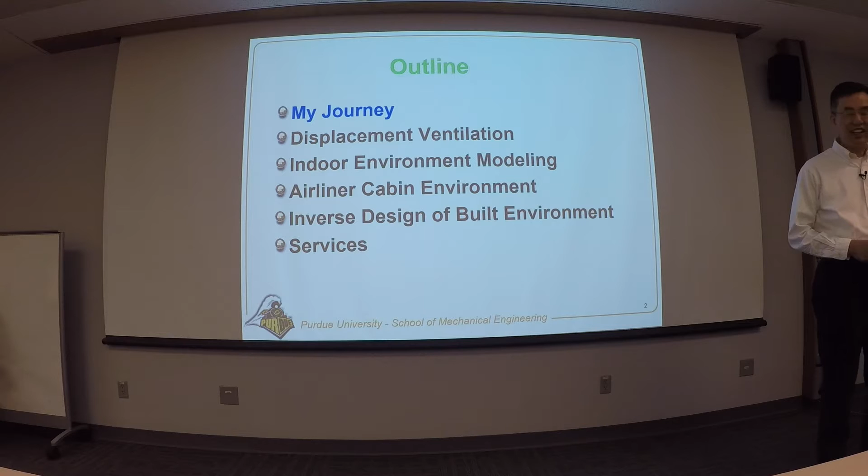So this is my outline of the talk. I will give a brief overview of my journey. So I grew up in a rural area in the southern part of China on the opposite side of Taiwan. And in 1978, I went to Tsinghua University and I received my bachelor degree in 1983. So it's a 5-year program. Then in 1984, with the sponsorship from the Chinese government, I was able to study at the Delft University of Technology, where I received my master's degree in 85 and PhD in 88. So I still love this place and I still remember that's the window of my office. So I've been there for 4 years.

Then within Europe, actually, after I finished my PhD study, I went to ETH Zurich to do my postdoc for 2 years. And then I returned back to the Netherlands working for TNO as a project manager. So TNO is like a national lab, but it's very applied. So it's more or less like a kind of industrial experience to my view. Then in 1995, I went to MIT, so restarted my academic career, where I served as an assistant professor and associate professor. So then 2002, I moved here to Purdue, the best place on earth. So, during my tenure, I've been working as a visiting professor, affiliated professor, adjunct professor, and honorable professor in different continents, including Asia, Australia, and Europe, for more than a dozen times.

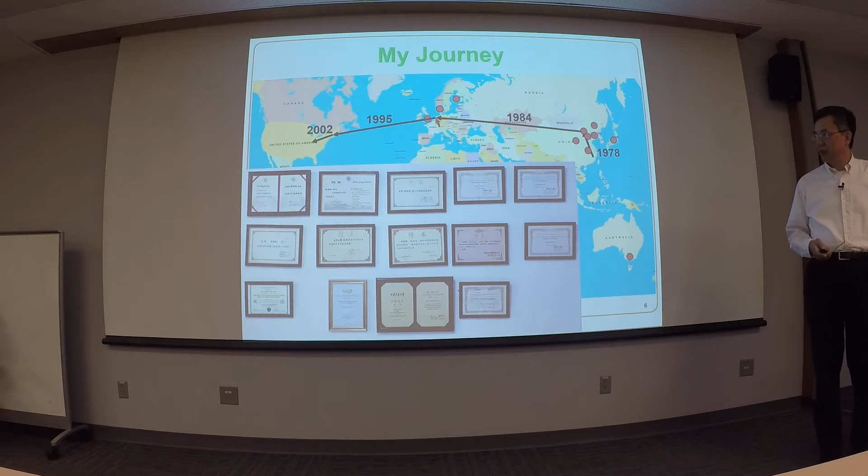So why did I end up with the building sciences? So when I grew up in the southern part of China, at that time, we lived on less than 1 yuan per day, not $1 per day. That's like a 10 cent per day type of life. So my biggest dream was not to become a farmer. But I grew up during the so-called Cultural Revolution. Probably everyone still has a kind of memory if you are sufficiently old like me. So this dream was very difficult to realize.

But fortunately, after the Cultural Revolution ended in 1976, Deng Xiaoping, the then Chinese leader, decided to restart the university. So then I was fortunately admitted to architectural engineering at Tsinghua University, the best university in China. So why I selected architectural engineering was because of my father. My father was a supervisor for a local merchandise company for all kinds of constructions. So he always brought home a lot of drawings and so on.

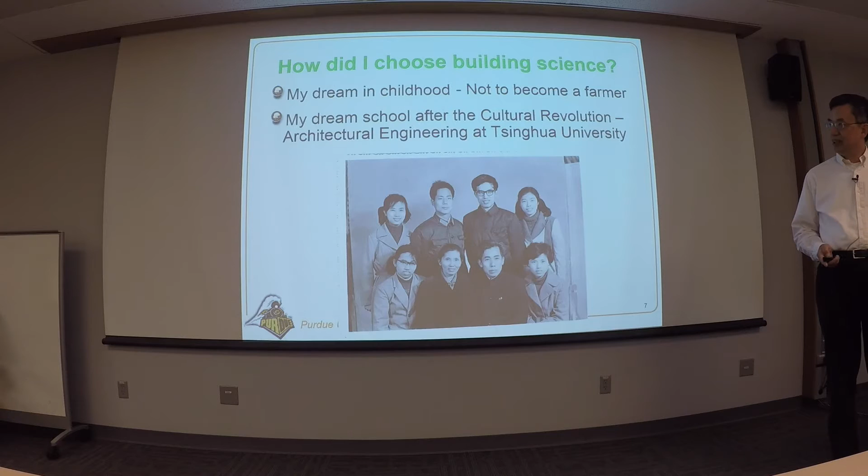And for me, I think that was really nice. So that's why I think I should study architectural engineering. But when I went to the university, I found that, yes, I get into architectural engineering, but there were only two choices for me: either I study architecture or HVAC, and not the civil engineering I had in mind.

So for architecture, I never learned how to do drawings. So I don't know how to do anything with architecture. Definitely I'm out. So I have to select HVAC. So it's not a very sexy area, but I found it's fun, for the rest of my life.

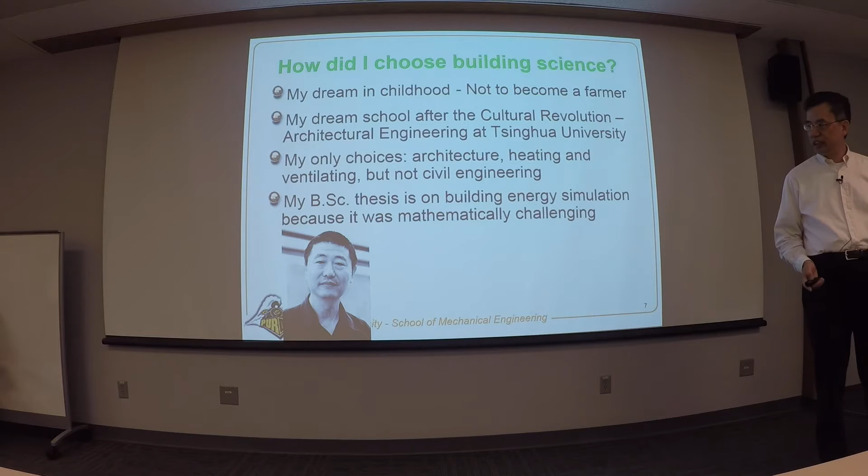Then for my bachelor degree thesis, I finally selected building energy simulation. And I made the choice because I think it is mathematically challenging. And that's because I work with Professor Yi Jiang, who is the son of a math professor. So he always taught me how to use different types of math to solve the problems, and that really fascinated me. And now Professor Yi Jiang is an academician of the Chinese NAE.

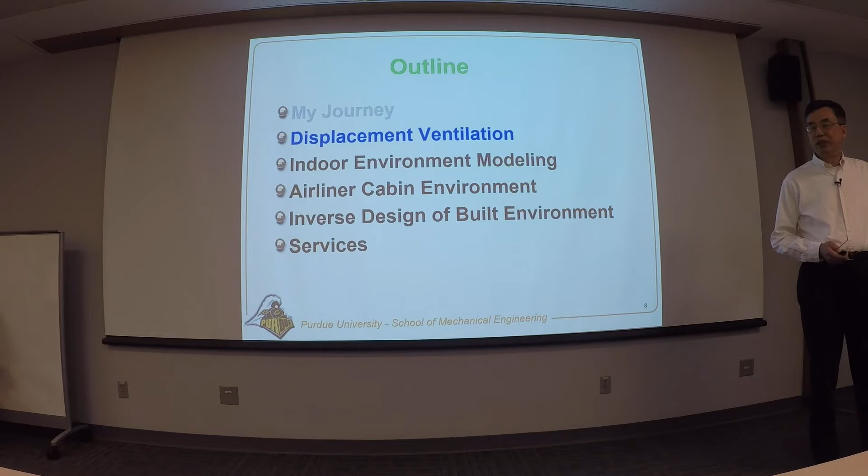So then the question is, how did I end up with the building environment? The energy and the environment is more or less like a twin. So in the 1970s, we know there's an energy crisis. The gas station in the United States doesn't sell gas. And energy was a big issue, like the energy use in this country, buildings use about 41% of the primary energy. So at that time, a lot of studies were done for buildings, trying to conserve energy.

But of course, in China, the Cultural Revolution ended in 1976. So our research in China was a little bit late. So even in the early 1980s, when I started to finish my bachelor degree, we were very hot in studying energy. So at that time, I was using Laplace transform and Fourier transform to solve the heat transfer through buildings. And the other day, when I prepared this lecture, I pulled out my bachelor thesis, and unfortunately, I don't recognize what is written there.

So I remember my professor told me, when you forget all this math, then you become a very famous engineer. Although I'm not a very famous engineer, definitely I forgot all my math.

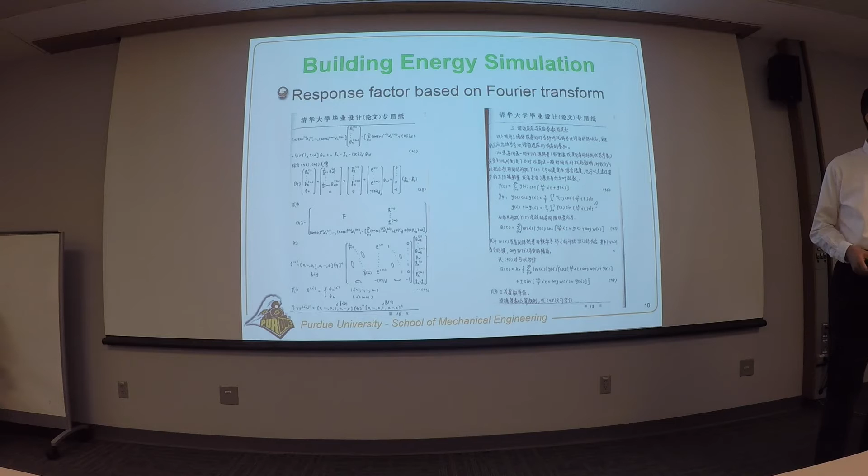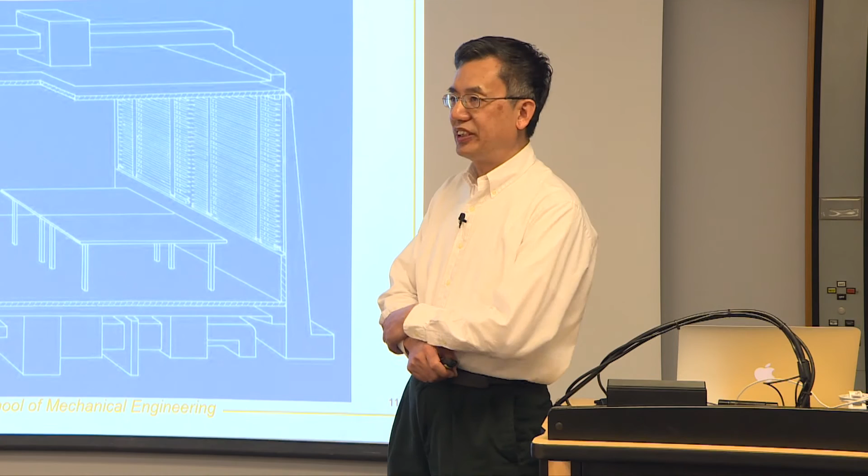Okay. So then after my bachelor degree, I had the opportunity to study abroad, and I selected the Netherlands because my supervisor there was studying energy simulation in buildings. And he gave me a very interesting problem, because this actually is his chamber for studying energy. So don't look at the arrows now. This chamber has two air conditioning systems. One, you supply the air on the top, and then it gets out at the bottom.

And the other one, you actually supply the air vertically underneath the window, and then also it gets out at the bottom. So he thought, okay, for this scenario, the airflow will go like that, and for this scenario, the airflow will go like that, and then the energy use will be the same, because this just dumps the energy into the room, so you should get the same energy. But when he measured this, he found, no, they are different.

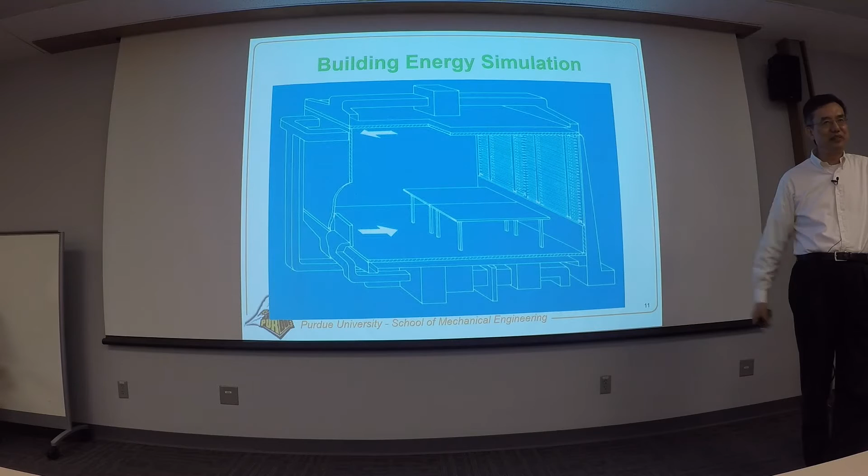With this one, the energy use is 1 kilowatt, and then he measured the other system, and for this flow the energy is only 600 watts. It's a 40% difference. Then he asked me to study why. So I took this as my master degree thesis. And at that time, CFD started emerging. Not very many people used CFD 30 years ago, but I was one of the earlier ones to apply it to HVAC systems. Of course, in fluid mechanics, there were already a lot of people using CFD.

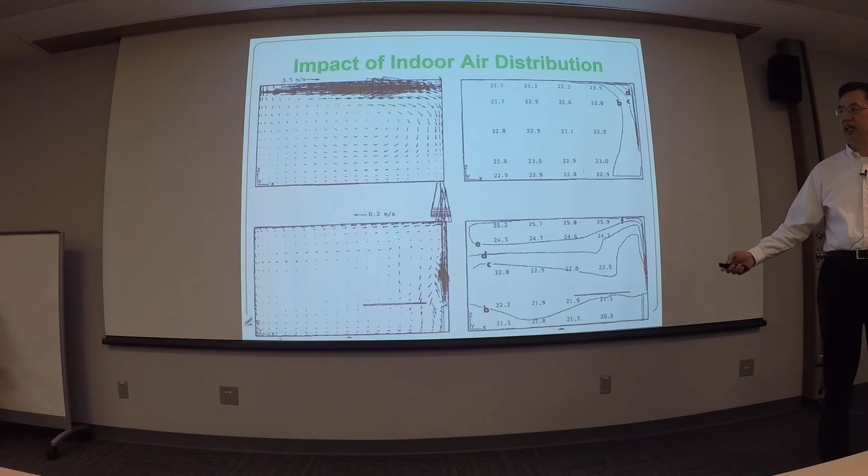And I found that for the first scenario, yes, he was right, because we do get this type of air circulation, and the temperature inside was uniform. So he supplied 18 degrees air in, and the exhaust was at 23 degrees. So there's a 5-degree difference between inlet and outlet. Now, in this scenario, he didn't realize that the airflow actually didn't reach the top. The airflow goes up and then drops down because of the buoyancy.

You supply cold air. So as a result, the lower part temperature was lower, and the upper part temperature was higher. And then when you exhaust the air at the bottom here, as you can see, this is only about 21 degrees. So the temperature difference is only 3 degrees. And that's why he said, well, it uses less energy. And when I found this result, I was very upset, because let's just say my supervisor did a wrong measurement, so it doesn't mean they're really saving any energy there.

So, but my research needed to move forward. But at that time, in the Scandinavian countries, they started to use this displacement ventilation, where you supply the air horizontally in the lower part of the room. And this is cool and clean air.

And then you have the people, heat sources inside, which of course generate buoyancy. And the polluted air will be exhausted at the top. This will create cool and clean air in the lower part, and then of course you have warm and dirty air exhausted. Then, if this is applied for cooling, that sounds like a great idea.

And I said to my supervisor, well, this really looks like what we studied, but just turn this diffuser 90 degrees, and we should be all set. And we can really solve this type of problem, because when you design such a system, there are a lot of risks there. For a designer, you need to understand that there's no draft risk at the bottom, because the cold air might go directly to your feet.

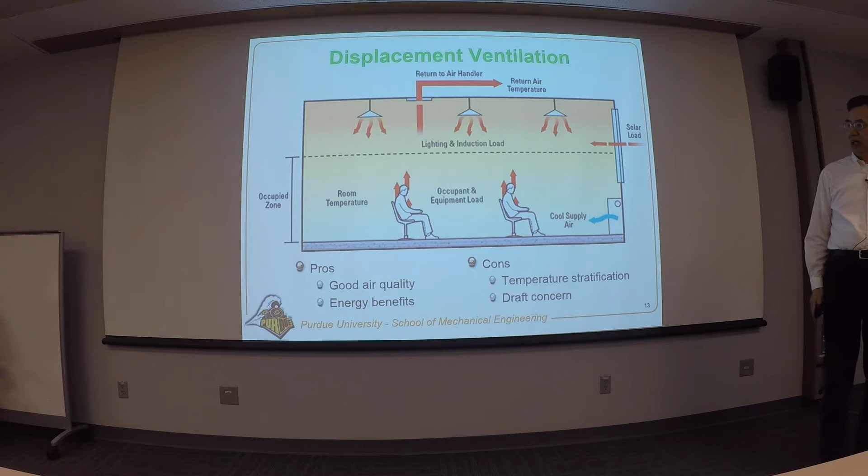And on the other hand, you need to control the temperature stratification. If the temperature gradient is too big or too small, you might end up very uncomfortable. So this part the CFD can do. And on the other hand, they claim this one can save energy. Looking at it in theory, yes, it's possible, but they needed to calculate that.

So with my knowledge, in the bachelor degree I had done energy simulation, and then for my master degree I had done CFD simulation. Then I said, look, for CFD simulation, I could really obtain the temperature boundary conditions from the energy simulation program. On the other hand, the energy simulation program needs information about the indoor air distribution, which is available from CFD calculation. So if I combine these two programs, I think I can solve a pretty good problem, which forms the basis of my PhD degree.

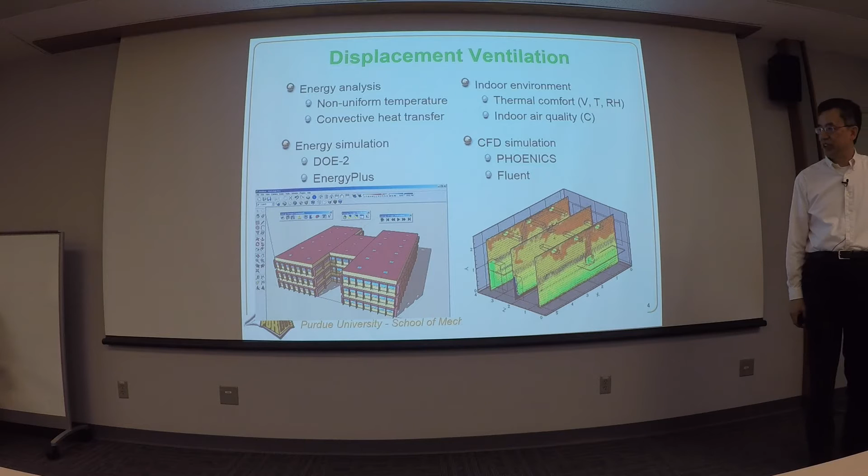So when I combined them, of course there were also a lot of challenges. For example, in CFD your time scale is in terms of a second, and to solve a room like this, you probably used tens of thousands of grid cells at that time. And then it took maybe a week on the computer mainframe to do the simulation at that time.

Then in energy simulation, the heat transfer time scale is in terms of hours. And you consider each room just one node, one temperature. And although the program is very complicated, you can solve it in seconds. So the combination of the two was pretty challenging. I don't think I'm going to go through the details, but I finally succeeded in combining these two programs and produced a couple of research papers.

And then I wrote a thesis on this title. A publisher came to visit my supervisor and was interested, so he decided to publish this thesis as a book. So I was very happy. They decided to print 400 copies, and I earned $1,000 as a royalty. Maybe today $1,000 doesn't sound like very much, but this was 30 years ago. As a student, I was very happy about that.

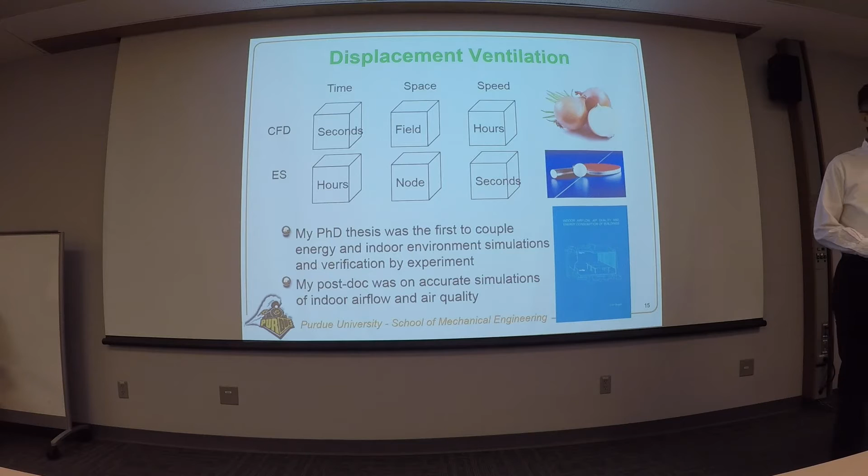So that's the first time I realized that knowledge can really sell for money. And that's why I decided to stick to this field. Then in my postdoc, I continued to work on this, and I geared it towards more engineering applications. And finally, I produced a design guideline. This was the second book, which we produced for ASHRAE, on how to design displacement ventilation for different types of spaces.

And this book sold pretty well. ASHRAE informed me a couple of months ago they decided to have a second print, and I'm working to revise this book. So this is my story with building science.

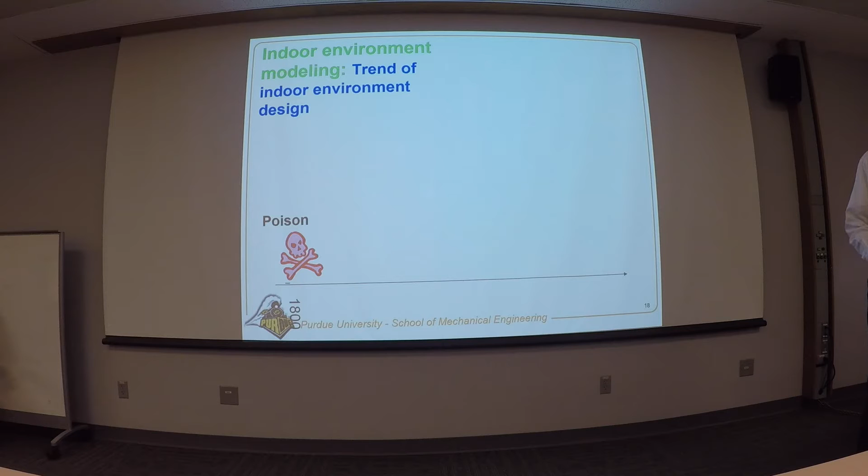Now I'd like to highlight a few things about the built environment. My later work was focused on the built environment. That's because in the 19th century, people only cared about poisoning. Even in the early 20th century, there was a contagious disease across the entire Europe. You probably learned about the H1N1 influenza. That was in 1918, which killed 50 million people in the world.

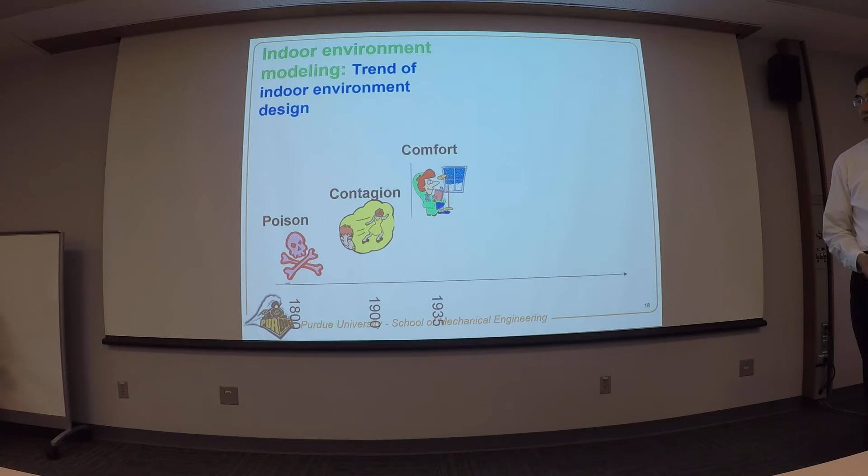So the indoor environment, especially thermal comfort, became popular only in the 1930s. Today, of course, we care about more than just thermal comfort and disease removal. We think about comfort, health, but also productivity and safety, etc. So if we look at the future, we'll think more about the personalized environment.

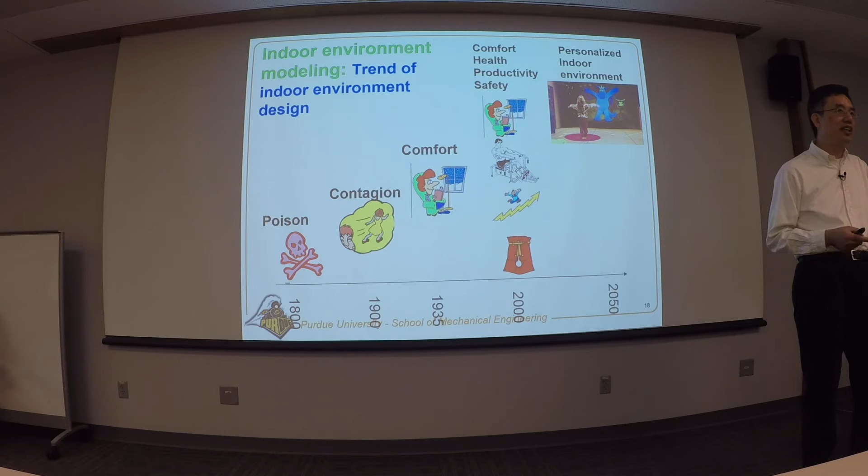Because like in this conference room, we sit close to each other. So if someone is sneezing or coughing next to you, you are likely to get a disease. So we need to design something which will really accommodate the individual's needs. And I also look at the clothing level. We have somebody just in a t-shirt and somebody with a very thick jacket. That means the thermal comfort level in this room might not really fit your needs. You have to use clothes to adjust.

So that's why we need to do a better job in designing the built environment. And also one thing is to use the CFD approaches. So CFD actually refers to three major steps. One is to solve the Navier-Stokes equation without any approximation. We call this DNS, direct numerical simulation.

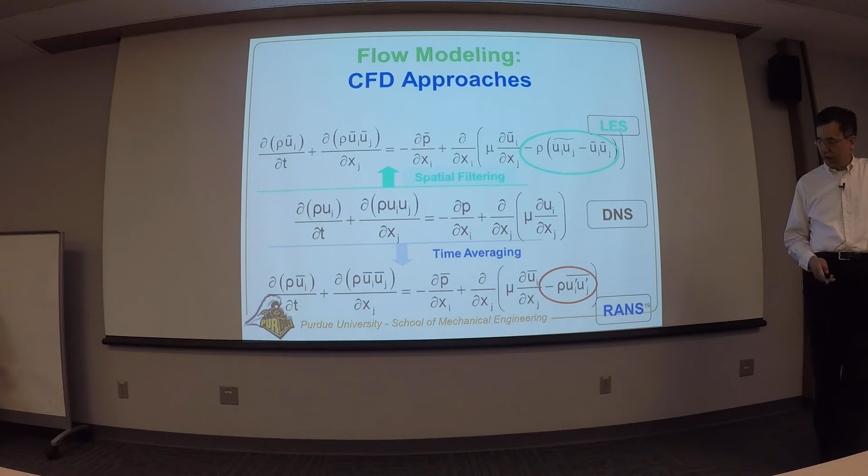So DNS actually calculates all the details, all the turbulence down to a very, very small scale. Now, large eddy simulation, you only calculate the major fluctuations, of course, which is turbulence. And the RANS model only solves an average velocity and then the percentage of fluctuation. So let's say three different methods.

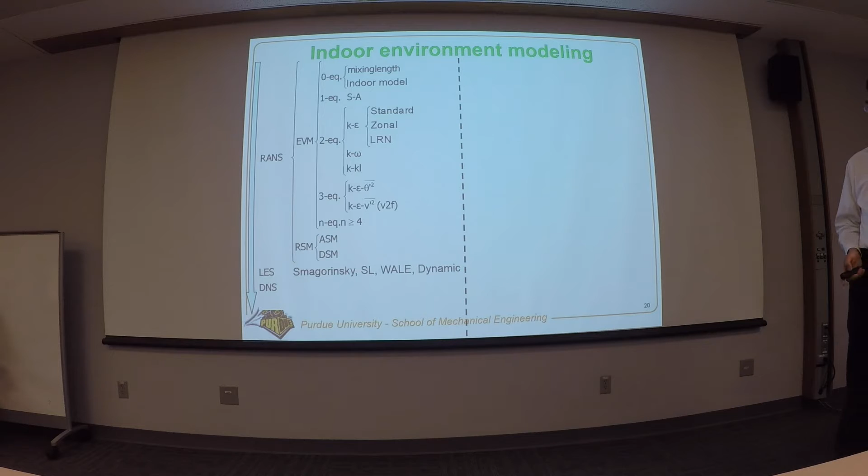Now, a lot of study has been done in this field, but when you apply it to the built environment, then the question for an engineer is which one to choose. So if you look at the history, of course, there are a lot of models being developed for RANS, for LES, and which one to choose. That's not a very easy job for an engineer coming in and picking up whatever is available and doing the simulation.

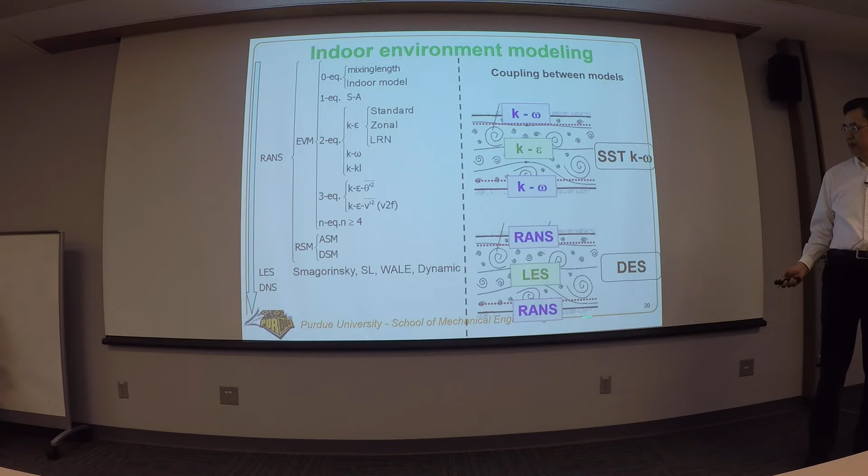And sometimes, in the fluid mechanics area, they of course can combine different models together. For example, you combine two different RANS models. There's the SST k-omega model, that kind. Or you combine a RANS model with LES, it becomes DES. So my past effort is really to study different types of models, and then try to find out which one is good for buildings.

So we look at a number of different building flows, and then use different types of models, and then try to grade them and see which one actually works the best for all types of flow. On the other hand, we also look at the computing cost. For example, if you look at LES, of course the cost will be a couple of hundred times more than the simple model. Then your question is, why do I need this complex model if a simple model can work? And that's actually a lot of engineering choices there.

It depends on what type of information we need, and the design criteria. So I think in the design world, they always need to have multiple choices for their design purpose. So just to show you how we often use this to do the building modeling study. So this is just to give you a scale, okay? That's 100 meters there. That's a group of buildings together.

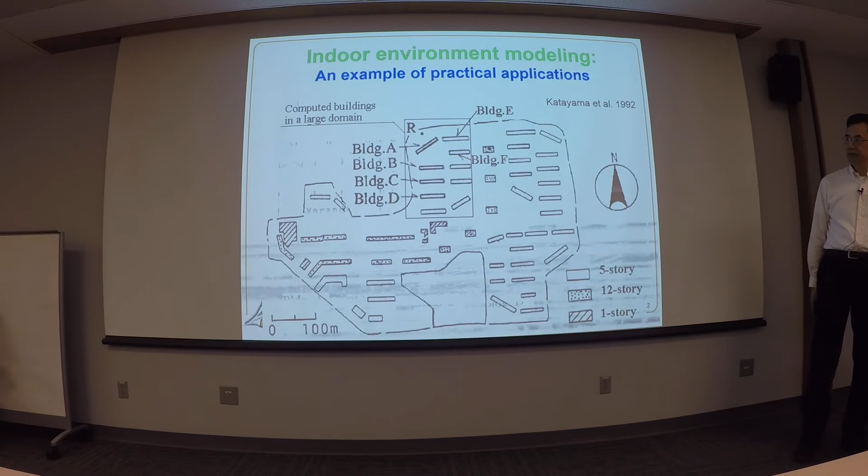And this is a study done in Japan. They measured the outdoor and the indoor airflow. Especially if you want to design natural ventilation, you need to do the study. So I used just these 10 buildings to do the study. And this is a photo of the 10 buildings there. And they also measured the airflow inside one apartment in detail.

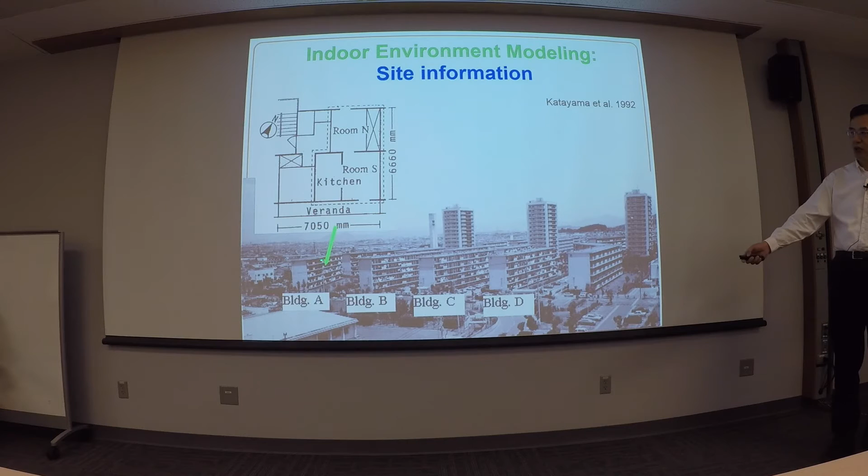Now, with large eddy simulation, as you can see here, you really can calculate the airflow around the buildings. Okay, so this information is very important if you want to design natural ventilation. How much air can come in? And before you do that, you do the outdoor airflow simulation, and you need to make sure this simulation is correct.

Because in CFD application, it's not a real joke, people always say it like this. If you do the CFD simulation, then nobody believes your result except yourself. And if you do experimental research on the flow, then everyone believes your result except yourself. Okay, so that's the reality. So we need to validate it.

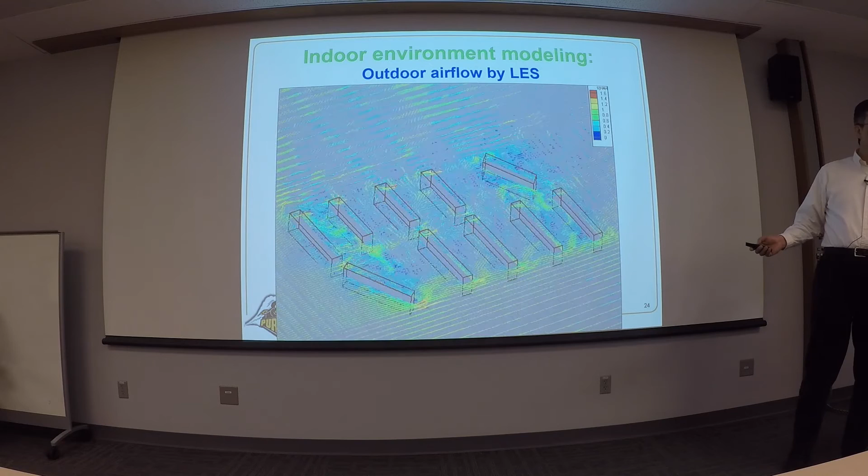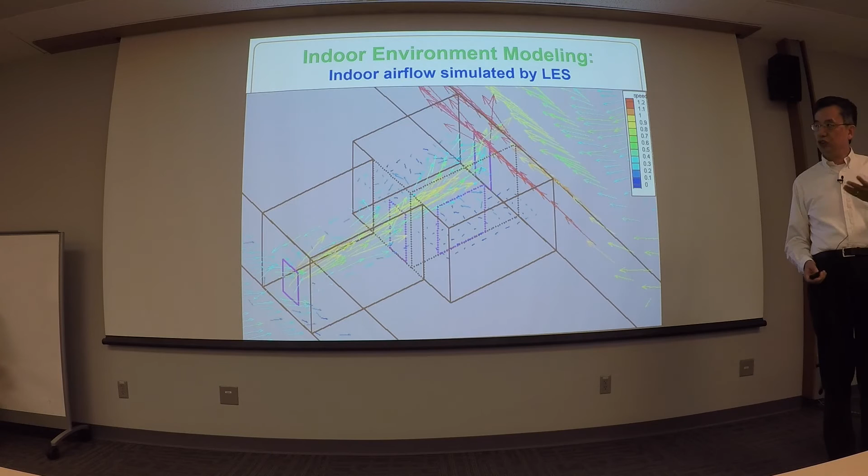So which is really a very good design practice. And then, of course, inside of buildings, you need to compare again what is simulated and what is measured. And because this is a very complex scenario, when you measure inside of buildings, at that moment, the boundary condition might not be the same as you use in the simulation. So you never get perfect agreement. So I will say that if you get agreement like this, with the same order of magnitude, and the difference is about 20%, that's very good.

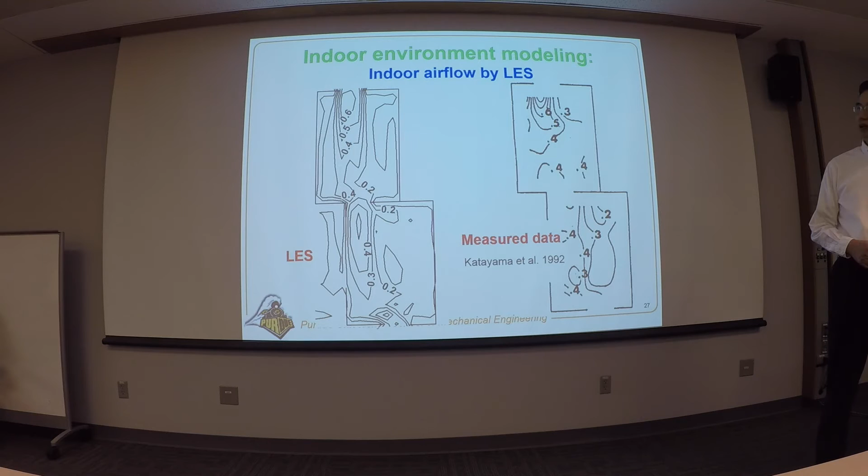But the simulation really takes a couple of weeks for the one I just showed you. So as a design engineer, you definitely have no patience to wait a couple of weeks in order to do a design case. So my effort in the past few years was to try to accelerate this. So I use this fast fluid dynamics. In fact, it also solves the Navier-Stokes equations, but just solves them term by term by using the split method. And then finally, you solve this advection term by using a semi-Lagrangian approach.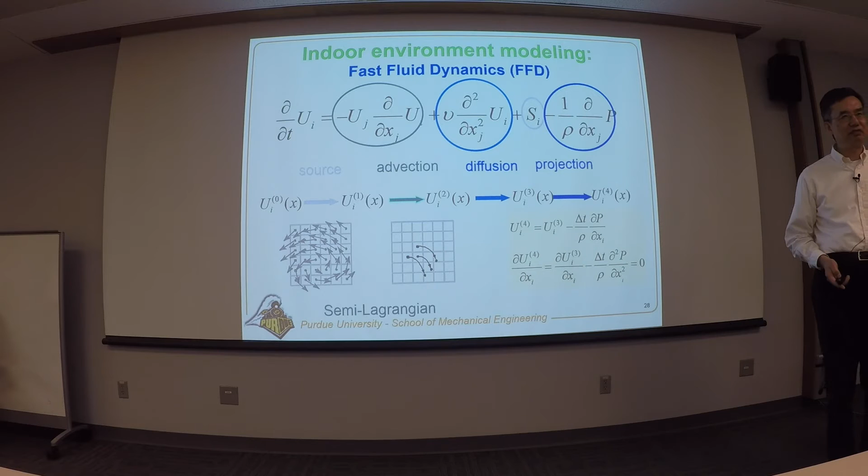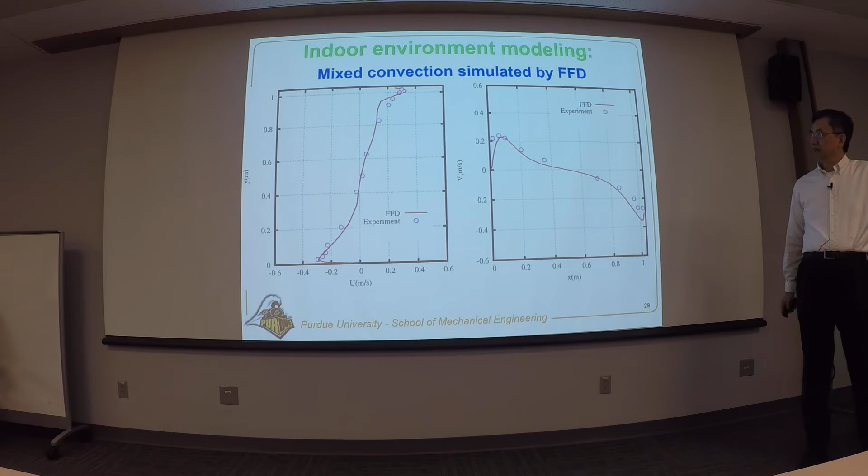So this one is being used for computer games. Of course, for computer games, if you get a reasonable visual effect, you are satisfied. But when you use it for building design, we need to look for accuracy. So with some type of improvement on the FFD, now we actually get a very good agreement, as you can see on the velocity distribution in these two sections here.

So I want to show you how useful this FFD is. For example, if I want to design a room, okay, this is a very simple one, with an inlet and outlet here. This should be the airflow pattern. So with FFD, I can run this here. So as you can see in this window, you see the air coming in, right? This is pretty fast here. And to show you this is not really animated.

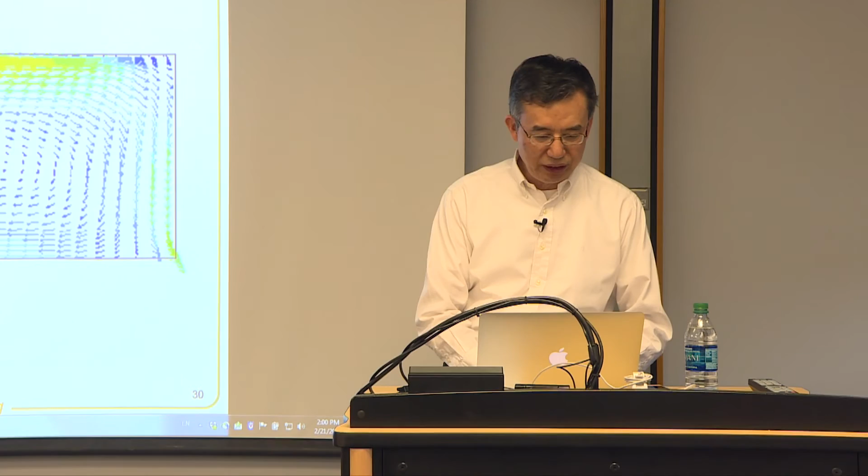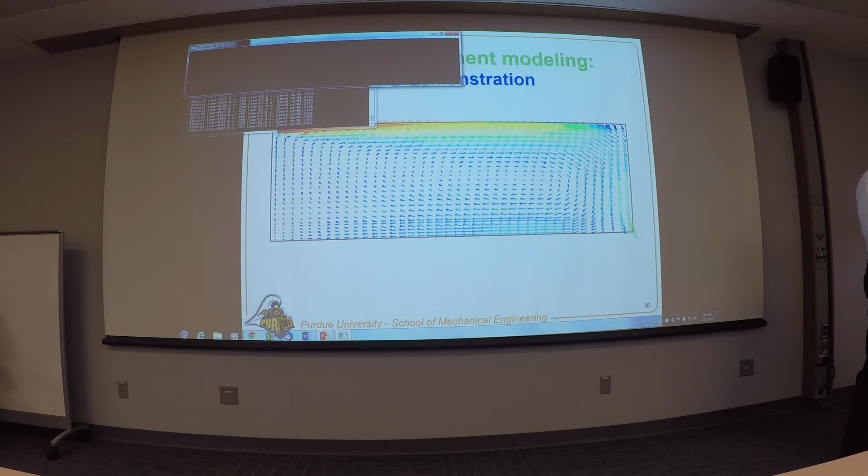For example, if I add a force here, as you can see, a lot of things can be changed. And if I want to study, for example, the smoke inside our buildings, then I can add smoke here. And you can see the air getting cleaner and cleaner. So with this FFD, the beauty is it's very fast. With my computer here, as you can see, maybe the font is too small here, this is about 86 times faster than real time. That's why you see the flow go very fast. So this has been a rather powerful tool for engineering application.

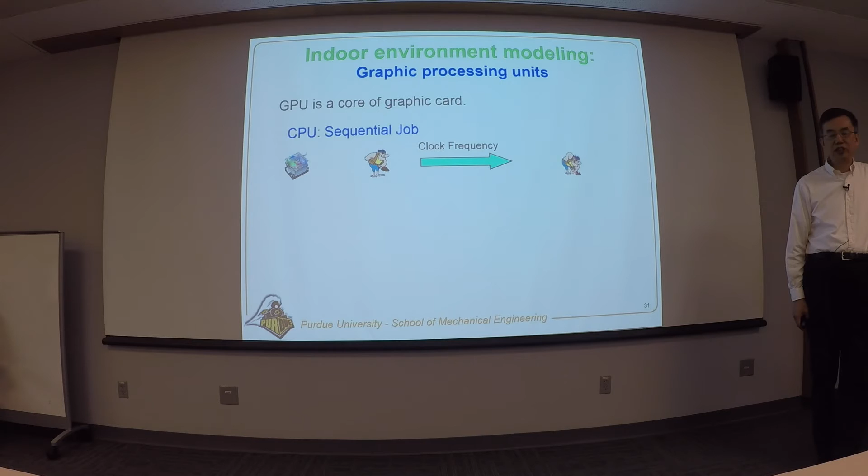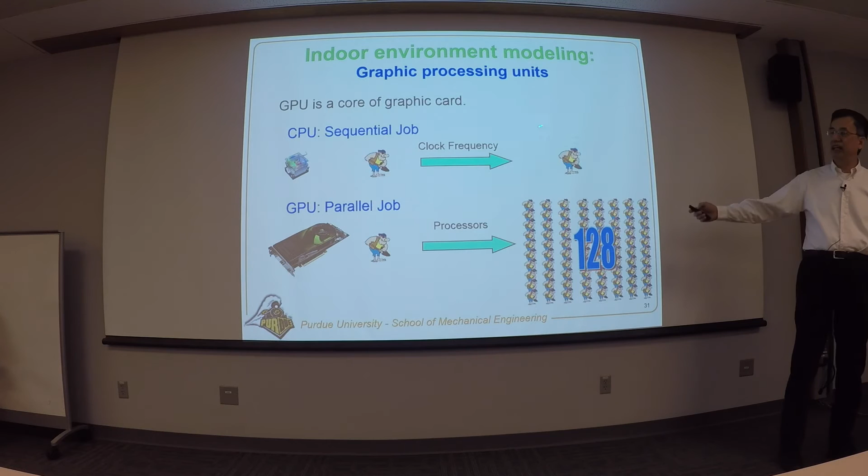But if you use it for a reasonably sized building, it still will be too slow. And therefore, we try to use different approaches to enhance the speed. For people like me, when we bought a computer in the old days, we always looked at the CPU speed, the frequency, right? And now frequency has increased to a certain speed. You cannot enhance it anymore because too much heat is generated in the processors. And today, young people, we have quite a few students here, when you buy a computer, you look for the graphics cards. Graphics cards have multiple processors inside. Each processor is not very fast, but you have hundreds of processors there. So although each processor is not very fast, so many processors working together is much better than a single processor. So we try to build the FFD on the GPU, and that has been pretty good.

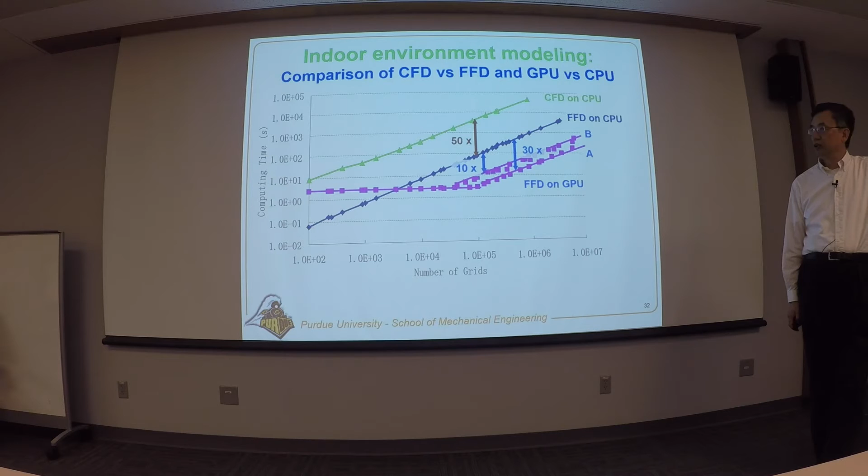As you can see here, this is the computing time, and that's the number of numerical grids we use. For buildings, we typically use 1 million to 10 million grids. So using a single processor, you probably need a couple of hours to do a simulation. But with this FFD, you can already reduce the computing effort by an order of magnitude. And then using the GPU can reduce it another 10 to 30 times further, depending on the number of grids you use. So that's been a pretty amazing speed. It can be 2 to 3 orders of magnitude faster. So we try to promote this.

And I often like to use this to tell the students it's important you get the speed right. Now, you do DNS. Very few people have tried to do that. You really need a lot of grids to catch the turbulent details, and that needs 100,000 years to run a job. So if you start your PhD study today, I don't know when you are going to get your degree. With large eddy simulation, it still can be challenging even with a very good computer. But when you use RANS, now it's possible. A lot of design engineers now are using RANS models to solve the problem. And with the FFD, during a coffee break you should be able to get the result.

So this result has been recognized. In 2002, MIT actually used my result as their telephone directory cover. And one thing is this very famous building here, that's Building 54, for the Department of Earth, Atmospheric and Planetary Sciences, designed by the very famous architect I.M.

Pei. When the building was designed, they found that if you opened the door you couldn't close it, or if it was closed you couldn't open it, because the wind pressure was too high. That was very famous. Later on, they had to put the doors on the four corners. The building looks very strange. Of course, I.M. Pei was a very great architect. He designed a lot of famous buildings, but also had some failed buildings.

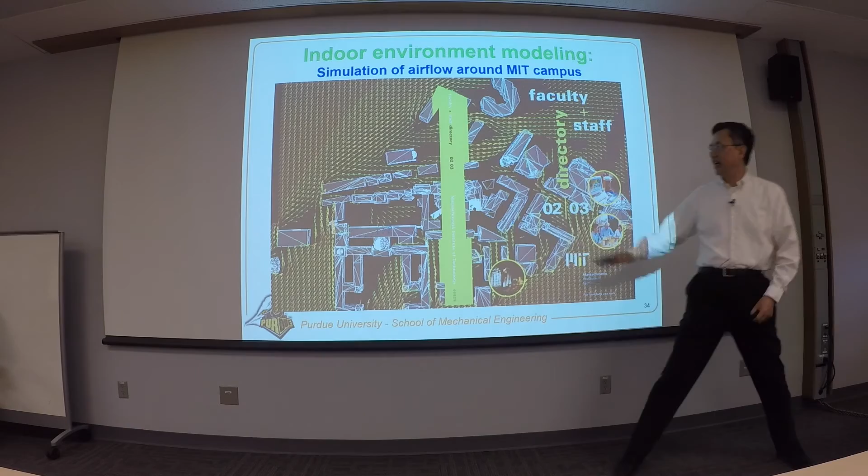Now at MIT, there was a development at that time, this computer science building, the Stata building. It was designed by Frank Gehry, also a very famous architect. He was afraid of making the same mistake, so he asked me to do the simulation on these buildings to make sure no similar problem occurs. Today the building is there, and there's no big wind, although it is in Boston. So it's proof that in practice, this tool has been useful.

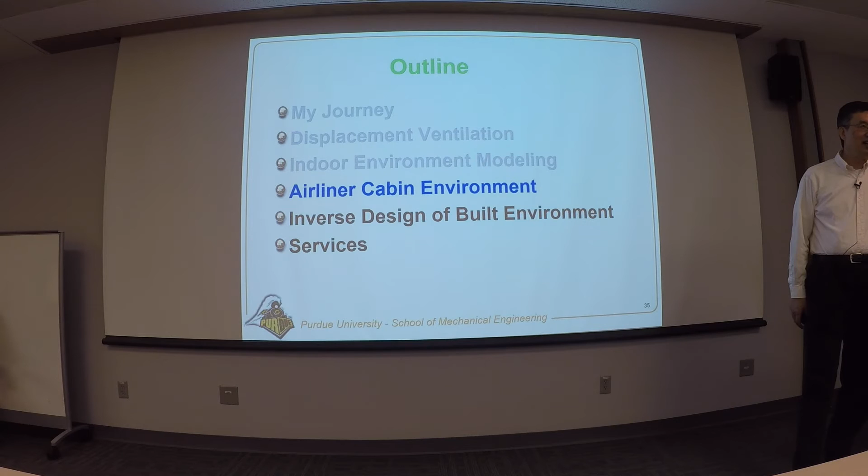Now, since I moved to Purdue, I changed from the Department of Architecture to Mechanical Engineering. I found this really gave me a new horizon to work on something different. At MIT, working with architects, I had to focus on buildings. When I moved to Purdue, I looked at airplanes. Airplanes are a major problem in case of an infectious disease outbreak.

We know there was SARS in 2003 and H1N1 influenza in 2009. Within a very short period of time, the disease can spread all over the world. This is very different from 100 years ago, when the Spanish flu killed 15 million people, focused on Europe. Imagine if the Spanish flu occurred today, the entire Earth might be wiped out. That's the reason I became interested in studying the airflow and infectious disease transmission in the airplane.

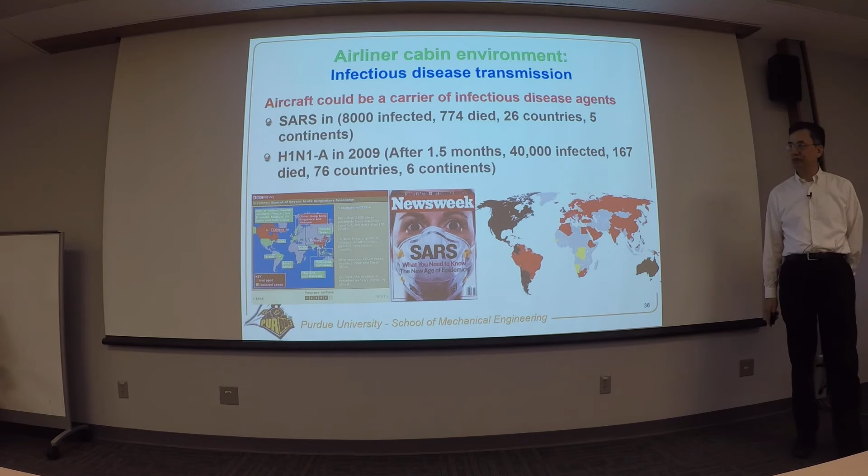Now, how does the airplane work? Maybe some of you might not know this. In an airplane, you get the outdoor air through the engine. The engine does the compression, making the pressure sufficiently high, then it goes through the air conditioning pack, and then you have the right pressure and right temperature, and the air is sent into the cabin. Of course, a lot of dirty things occur in the cabin due to the passengers, so part of the dirty air needs to be dumped outside, and another part can be filtered and recirculated.

My job is to look at different types of measures for preventing infectious disease. For example, in an airplane there are always a lot of small nozzles overhead. We call them gaspers. If you turn on the gaspers to supply very clean air, maybe they could prevent disease transmission. But when we did that, we found it's very challenging. Airplanes are manufactured to a very high precision. Even the gasper has an opening size of only about 0.1 millimeter or 1 millimeter.

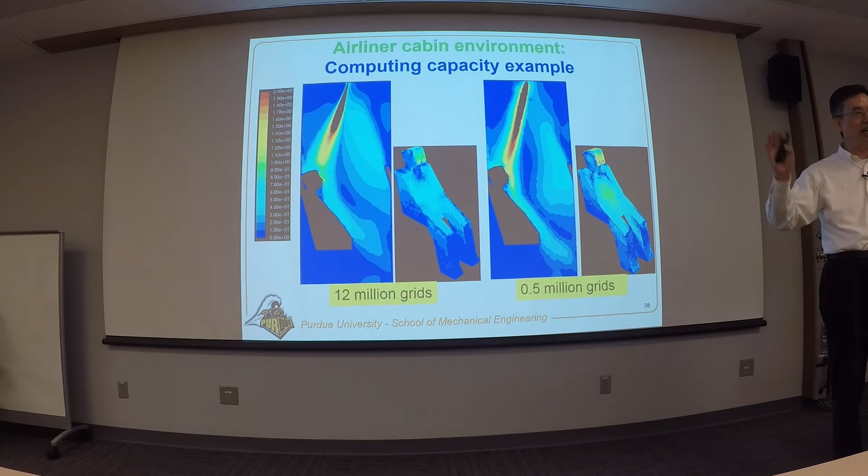To simulate the flow from the gasper to the person, we found that we need 12 million grid cells. If I use fewer grid cells, you can see the results are different. So that was very challenging. If one person needs 12 million, then for a plane, I don't talk about the A380 or Boeing 747, the Boeing 737 can house 200 people. So we would need a supercomputer for this study.

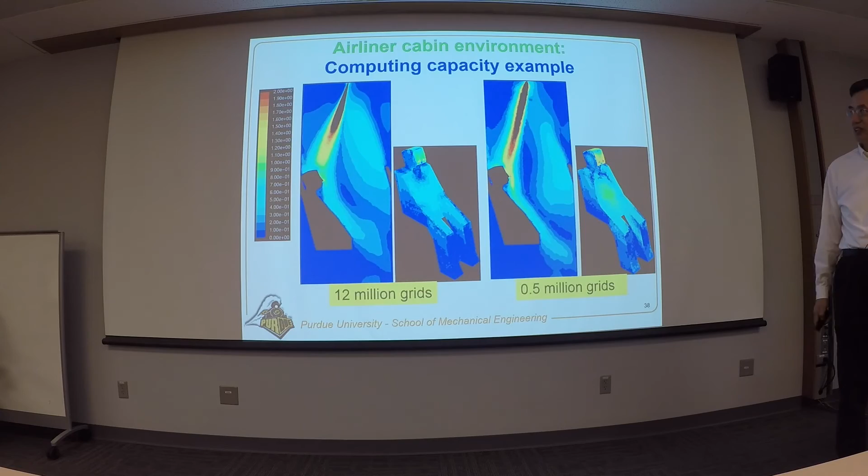And then, of course, by working with Tianjin University in China, we could measure what happens in the cabin. And the cabin is pretty big. Normally when you use a PIV to do the measurement, you only measure a very small domain. So we managed to combine a few images together, and we get the airflow inside of the cabin. And then we used even a full-scale real airplane to measure the boundary condition.

And then we found this boundary condition was just as mad as you can imagine, as messy as you can imagine. Normally we think the airplane is really high tech, right? Everything is measured to very high precision, as I said, 1 millimeter for the opening. But we found that when I measure the airflow supply on both sides of the plane, they are not symmetrical. Even along the length, some of them have very big flow, some of them very small flow.

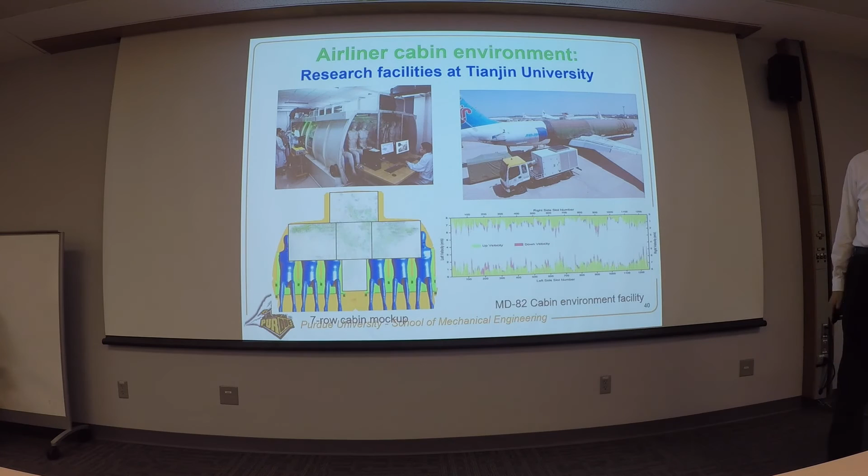And later on, we found that even just a very small nail hammered into the inlet could change the airflow pattern dramatically. So this is not an easy problem to solve. But anyway, by doing very detailed measurement, we were able to get the boundary condition for our simulation. And with the simulation, you can do a lot of fun things here.

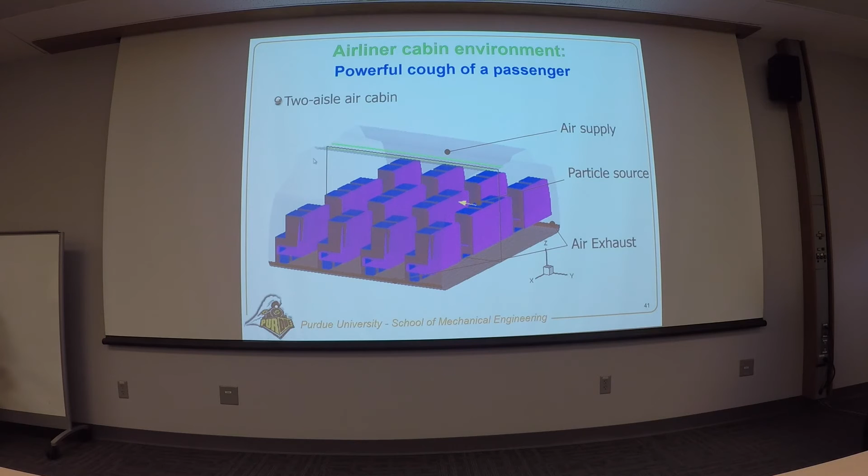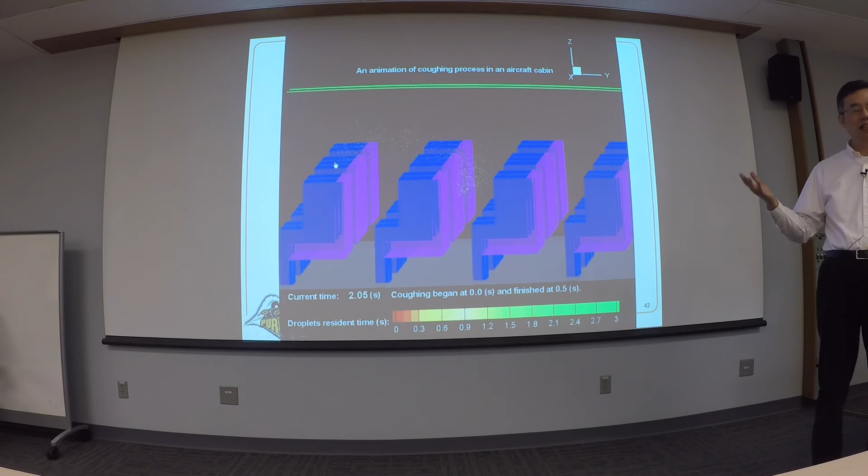For example, if I want to study somebody coughing, like this person is coughing, this is what CFD can do. You can really study how the particles with the virus are traveling inside. And of course, this must be a very powerful cough, otherwise it doesn't go 2 rows away. And this can only be done through CFD.

Because with CFD, you can see all the details, where the airflow and the particles are going, and you can even see the particle size as it's evaporated during the transport. And this type of detail you cannot measure, because so far no equipment has the ability to capture this type of detail.

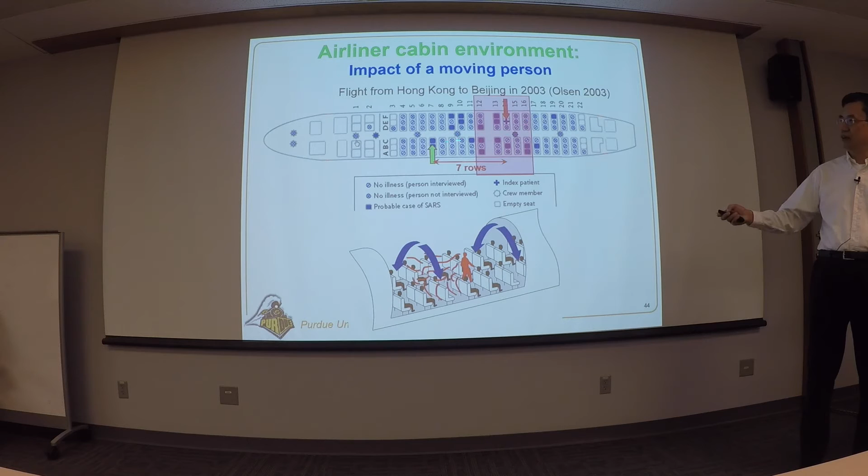Now, if you look at this cabin, you will see the people affected might not just stay near this person. Some of them can be a couple of rows away, 7 or 8 rows away. So we need to understand why it occurs.

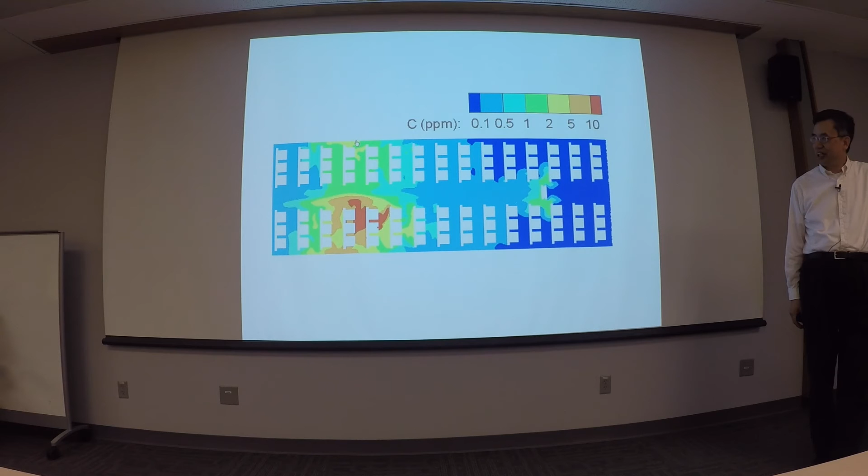So we suspected that a walking person could really have an impact. Let's say a person walks around; the impact isn't just there. But if we stop here, you can see the virus really could go into the cabin, and that person could be affected. Of course, this is no proof that we can confirm that's really the true case, but in theory, this is a possible scenario.

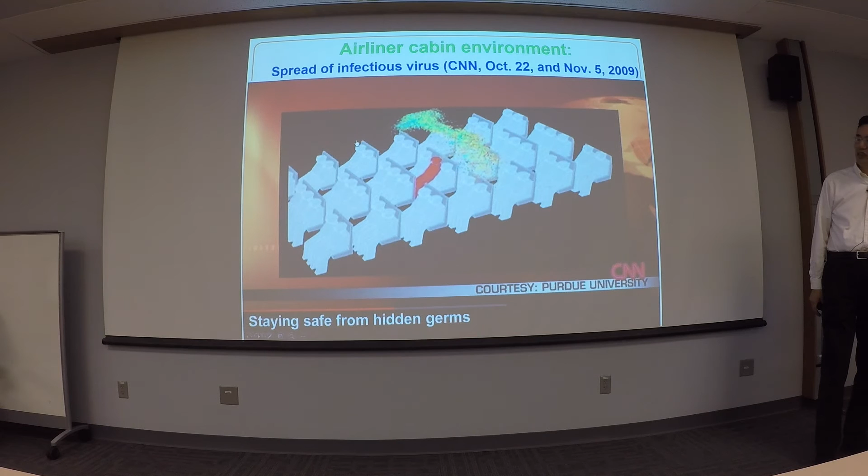And with this, CNN got excited a couple of years ago. They decided to show this to the public, so they used our result to show how important the transmission can be. So we simulated a case, one person here who is coughing, but this is just a normal cough, okay? You see, it doesn't go very far away.

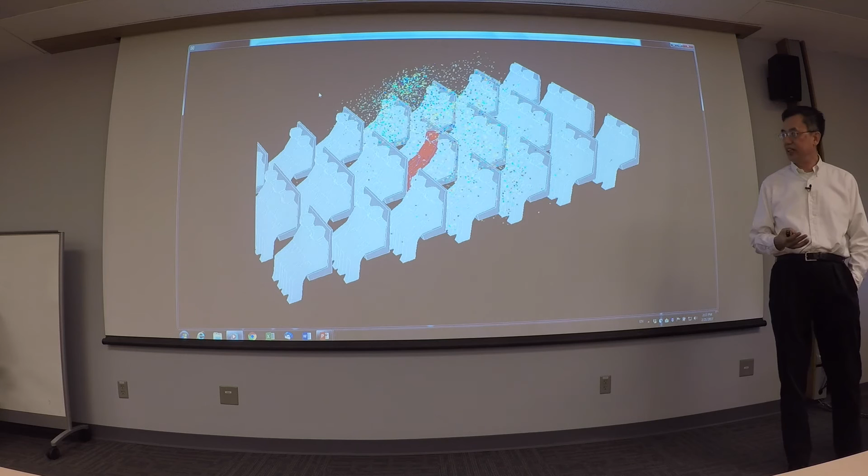And then by working with the Harvard School of Public Health, we tried to understand, if somebody coughs out the SARS or influenza virus, how many people could be affected? And that I found very interesting. The public health scientists have a model that can tell us the probability someone can be affected by a certain level of a virus.

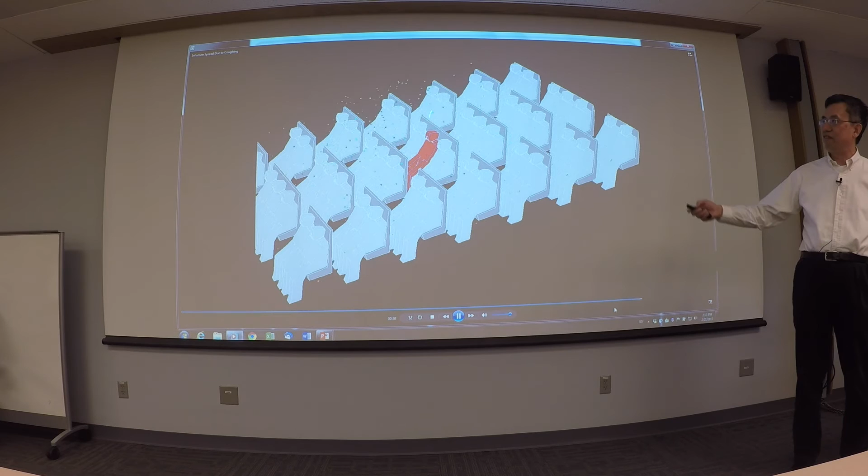And for this cabin scenario, just wait a few seconds until it ends. We'll find out those people will be affected with a probability of more than 90% for a 4-hour flight. So when you are flying, it's better not to sit with someone in the same row. Sitting in the front or the back will be fine, but not in the same row.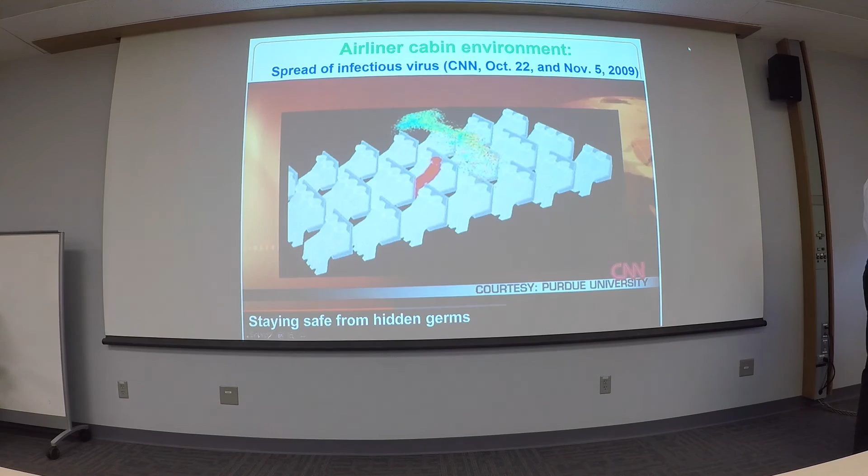So this is just to show the importance of the CFD result. But of course, you need to know who is sitting there. And I think that still some of you might remember this person called Andrew Speaker. In the US, we have two no-fly lists. One is for terrorists; of course you cannot fly. And another is for someone like Andrew Speaker who has incurable tuberculosis, so that he cannot fly.

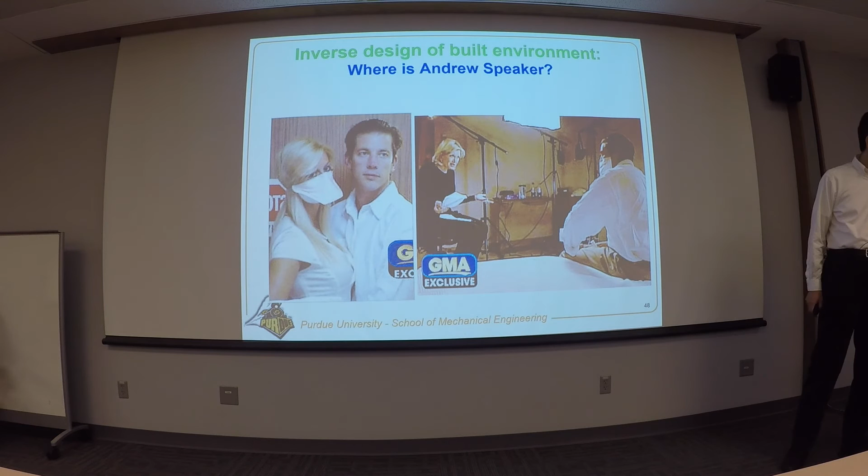But this guy wanted to marry her, and they decided to have a honeymoon. So as a result, they flew out of Atlanta to Rome, and then returned back to Montreal. Probably some of you still remember the news, right? Then people asked me, CNN asked me, well, can you do something to catch this person in case he was on board an airplane? So, of course, now the sensor doesn't have the ability to detect TB right away. But suppose we have a sensor that can detect TB right away, for example, I install the sensor on top of the ceiling here.

And by using the so-called inverse modeling, we could really determine where the source is. So this is just inverse simulation, and we find more or less the area we like to find. And of course, you cannot just solve the Navier-Stokes equation to get it, because the Navier-Stokes equation is not reversible. When you reverse it, it doesn't work. So we have to change the Navier-Stokes equation a little bit to make sure it doesn't lead to entropy production. So that was also reported by CNN.

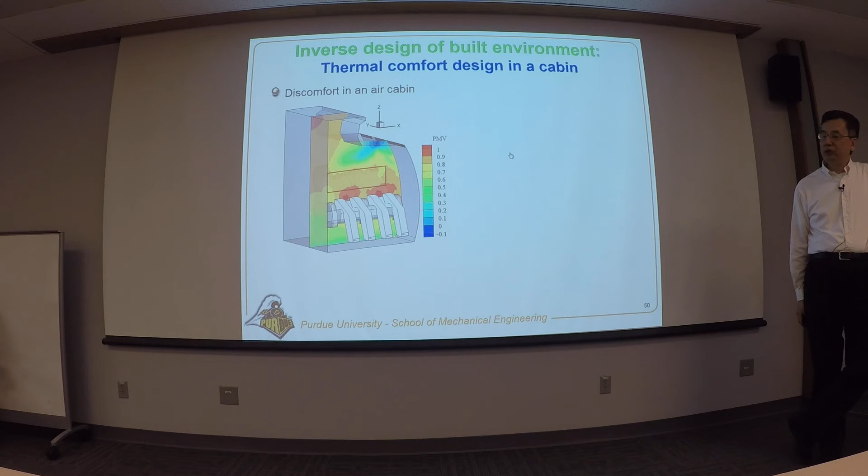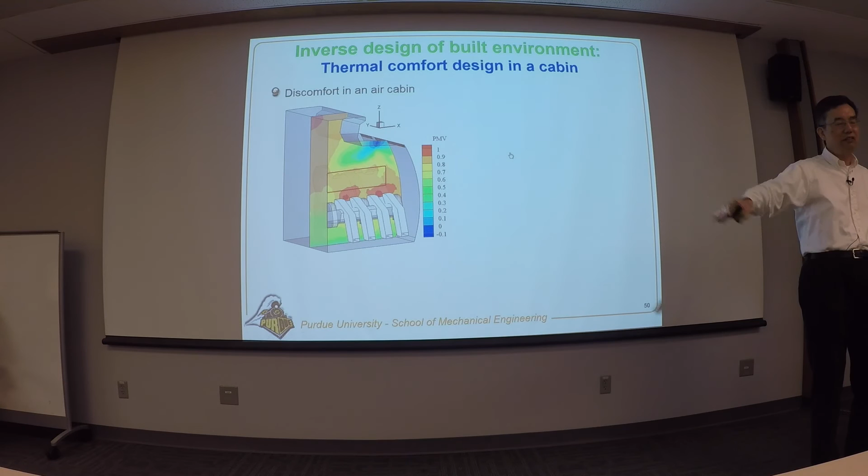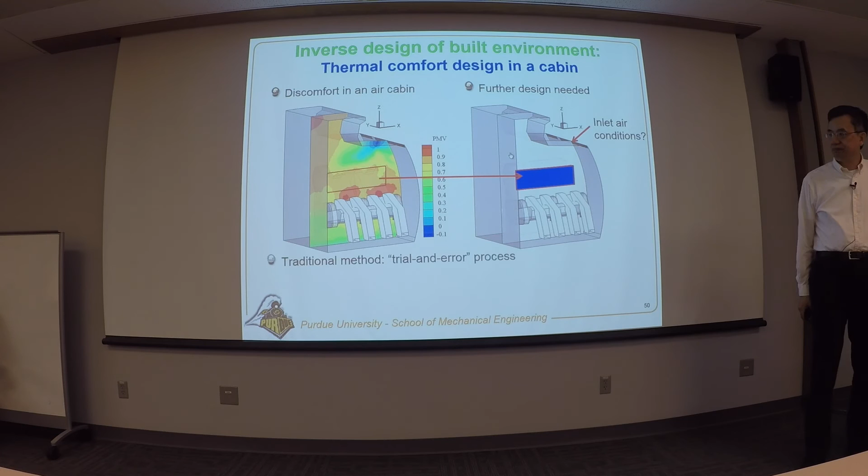And now if we think about this reverse simulation, we could think about how I could design something even better. For example, somebody like Melba, you sit there, you want to be comfortable. I only want to design your area to be comfortable. And in the front, nobody is there, we don't have to take good care of that. So I just want to see, can I find out what type of system could lead to that type of design? And that is inverse modeling. Traditionally, you can try multiple ways, and you might not get a good result. And therefore, we just use this inverse modeling.

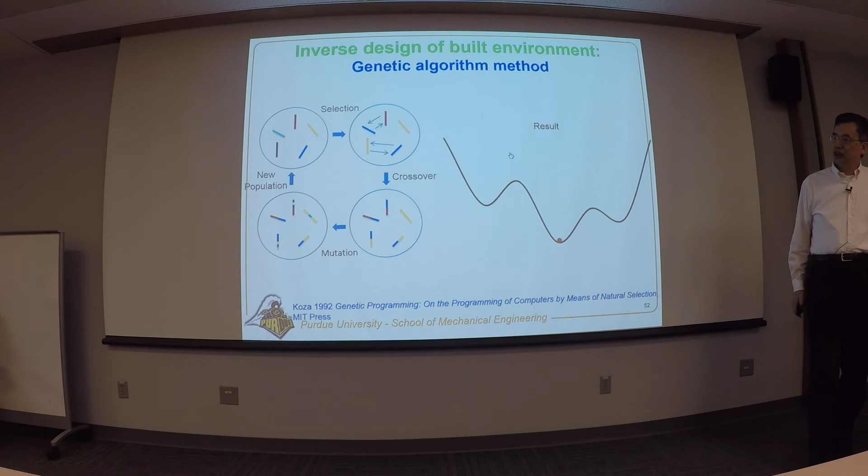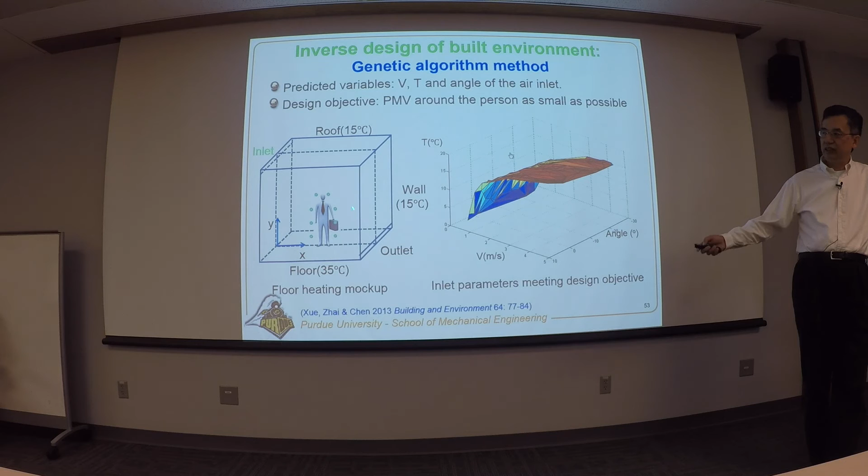And in the past few years, we have done a number of inverse modeling studies, as you can see here. And I want to pull out just two methods. One is a genetic algorithm, which uses the genetic algorithm method to select the best solution. You could finally end with the best solution, which could lead to the desirable design. For example, for this simple room, we find out that with the parameters inside of this color domain, which means a certain temperature, velocity, and angle combination, you can design the environment around this person to be comfortable. And the same thing, if I use the adjoint method, which is a kind of gradient method, you can also find out what the best solution can be.

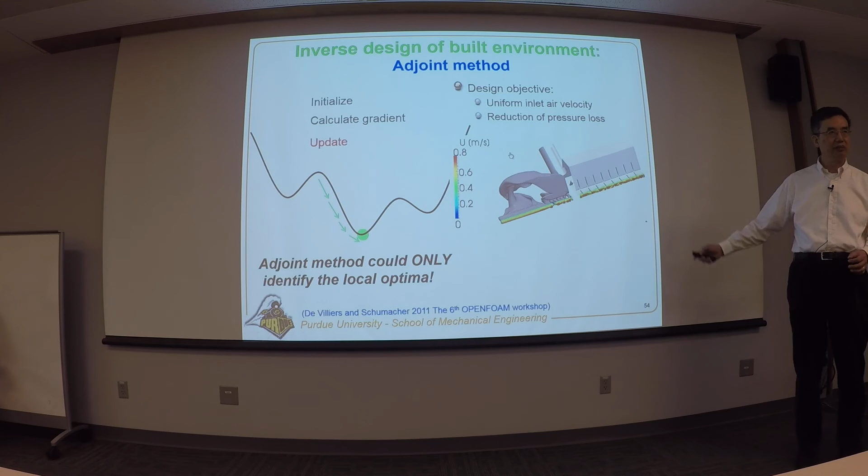So to do this, it can be very interesting. For example, if I want to design a diffuser which can supply the air velocity uniformly through the diffuser, by using this adjoint method, you can find a very strange shape of duct. This duct I don't think you can imagine yourself. But by using the inverse modeling adjoint method, they can produce this shape, and then get a very uniform distribution. Otherwise, with your conventional design, you will never get that type of uniform distribution.

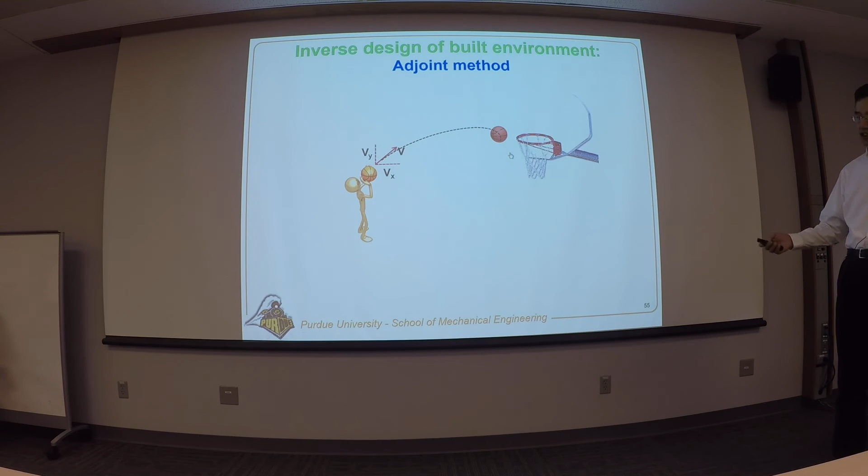So we use this method; in fact, it's really gradient based. For example, just like you are shooting a basketball, the first time you shoot it doesn't get in, then you adjust the distance through the gradient, then the second time you will get it. So with this, I use the method to design the thermal comfort inside of the cabin. With traditional design, you will not get a very comfortable result. But inverse modeling will allow you to get the best comfort possible. But of course, then the diffuser location, the velocity, the temperature will be very different from the traditional approach. This approach you normally cannot imagine yourself. But of course, there are still a lot of things that need to be worked out.

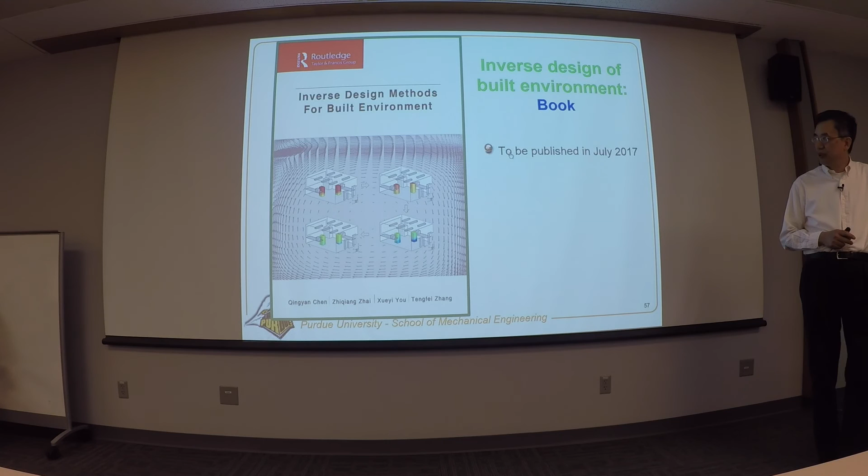But with this, we are happy that another publisher, Taylor and Francis, decided to publish a book on this one. This book will be published in July. It's 80,000 words, six chapters.

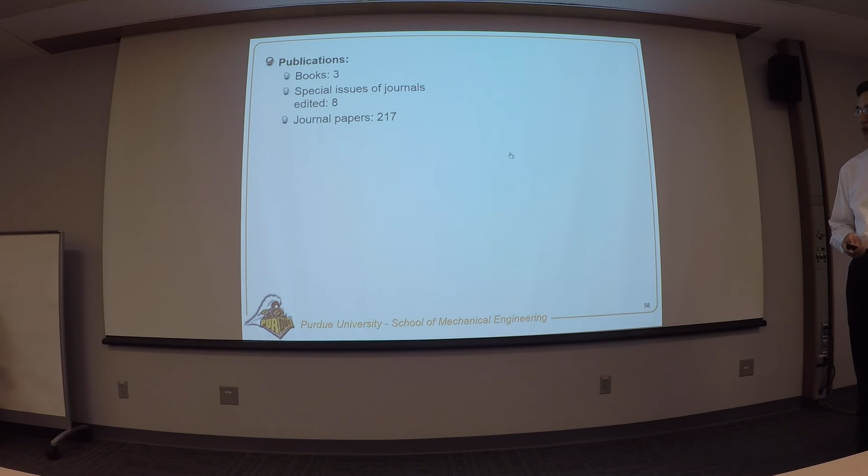So, yeah, I've used quite a lot of time now. Okay, just quickly here. In my career, I've published three books, edited a couple of journals, and published over 200 journal papers, a few book chapters, etc. I also got some patents and was invited to deliver a number of lectures. Just to mention here, on Google Scholar, today I looked at over 10,000 citations in my career. And since 2012, I have about 5,000 citations.

Melba just mentioned a number of important awards, so I don't think I need to go through the details. So finally, I want to spend just 3 minutes to talk about another aspect that I contribute to, that's about services. Since 2007, I've been the editor-in-chief for this journal. This journal is one of the oldest in our field. It started publication in 1965.

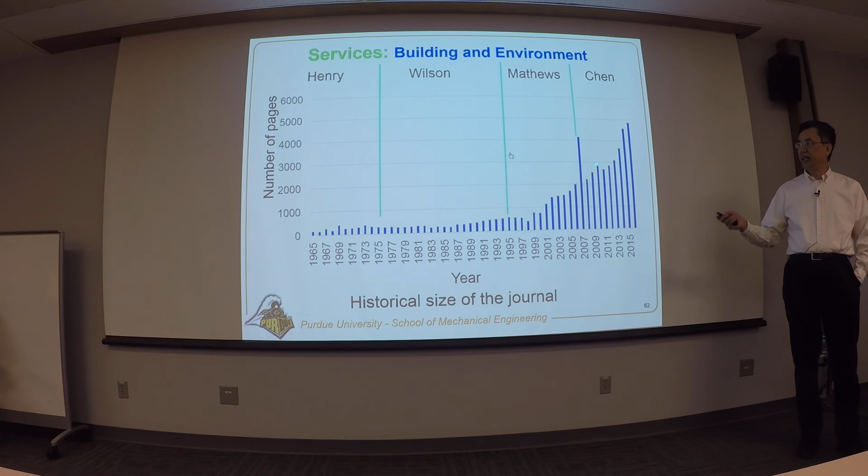Before me, there were 3 other editors. In early days, not a lot of publications, but since 1990, the publication just boomed, as you can see here. And under my editorship, we improved a lot on the journal impact factor. In early days, it was never higher than 0.5. Since I started this editorship, currently our impact factor is

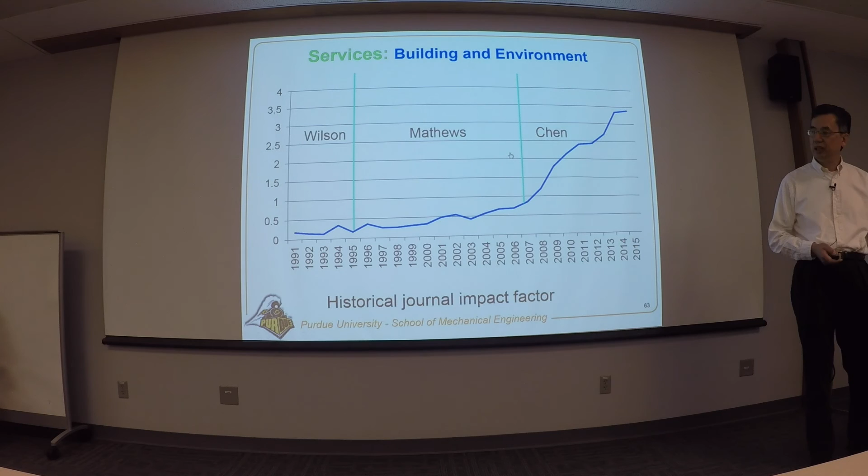3.34. So the journal is ranked 3 out of 269 in the building and construction category, 4 out of 379 in the civil engineering category, or 4 out of 172 in the environmental engineering category.

So finally, I'd like to thank everyone who has contributed to my work. I don't think what I just talked about so far is just my own contribution. The majority was done by my current and former graduate students. Without them, I think probably my publications so far would be just 10. Then, of course, there's a lot of funding from the government, and the journal is working with a lot of editors. So I will stop here and see if there's any questions from you guys.

Well, what's next? The question, what is next? Yeah, I think this is a very challenging question, right? Definitely, I think the tools I developed so far have been very useful. And Jimmy and I have been working together, trying to get something big for buildings. I still think buildings use so much energy, and people care so much about the indoor environment. So my focus will definitely be in buildings.